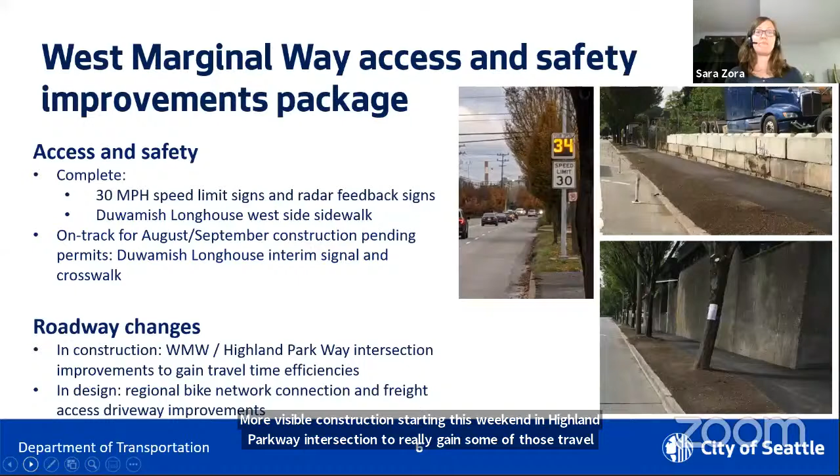As you know, we also have additional roadway changes coming. We're going to be in construction here starting, we've done some light construction already, but more visible construction starting this weekend at West Marginal Way and Highland Park Way intersection to really gain some travel time efficiencies. I'll talk about that in the next slide. We're also still in design on the regional bike network connection and some of the freight access driveway improvements we want to make.

If you go to the next slide, I'll just remind people about what the West Marginal Way, Highland Park Way intersection improvement is about. It's really trying to ensure that we can have more efficiencies at this intersection and make sure that the traffic signals can really produce and move more people than we are able to at this time. So this graphic is just a reminder of some of the things we have coming up here.

We're going to be removing portions of some of the islands that you see in the intersection right now, and those are highlighted in the orange color. A big purpose of this project is to have two left turn lanes from southbound West Marginal Way to eastbound Highland Park Way, to be able to do those two maneuvers at the same time as a right turn from Highland Park Way to northbound West Marginal Way. So those were some of the big parts of the intersection improvements we were making.

We're also going to be adding accessible pedestrian signals, and we will be upgrading all the curb ramps at some point in the future as well. The primary curb ramp we're going to be focused on is the northwest corner of the intersection, where we're going to be relocating a bus stop as well. So we really wanted to make sure that had solid pedestrian amenities and accessibility. Again, this is really helping us make sure our signal timing is going to be coordinated with other signals along this corridor as well.

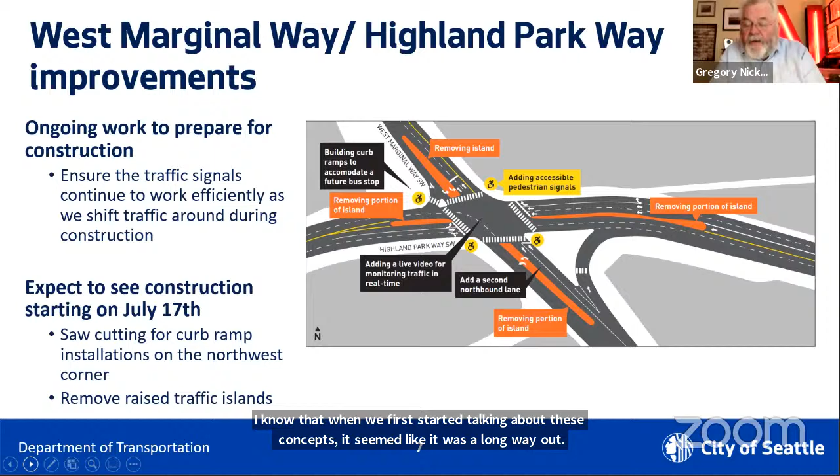Thank you. I know when we first started talking about these concepts, it seemed like a long way out. It seems like you've moved it forward a fair amount, and I want to thank you for that. I know that represents a lot of work on a number of people's parts. It's really good teamwork with our design teams and our crews, aligning it all appropriately to get it done.

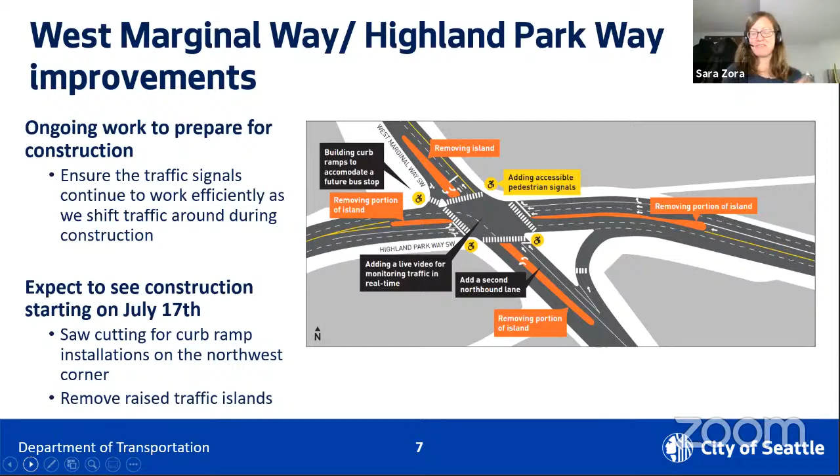So there's a lot of background going on for this project. Megan, if you can go to the next slide. We're going to talk about some of the larger part of the roadway change project. As you know, the connection for the bike lane we had recommended was going to be a 2-way protected bike lane in the outside curb lane, that southbound lane.

What you see in front of you is a cross section of West Marginal Way Southwest looking northbound. We are committing to maintaining freight mobility by having 12-foot travel lanes, which is in our design standards, plus a 8-foot 2-way protected bike lane with a Jersey barrier as the protection and a larger buffer space than typical to improve sight lines and provide a comfortable space for people riding bikes, while maintaining that mobility. All the analysis we've shown indicates the impacts for people traveling in their vehicles would be negligible, about 5 seconds maximum on average total delay.

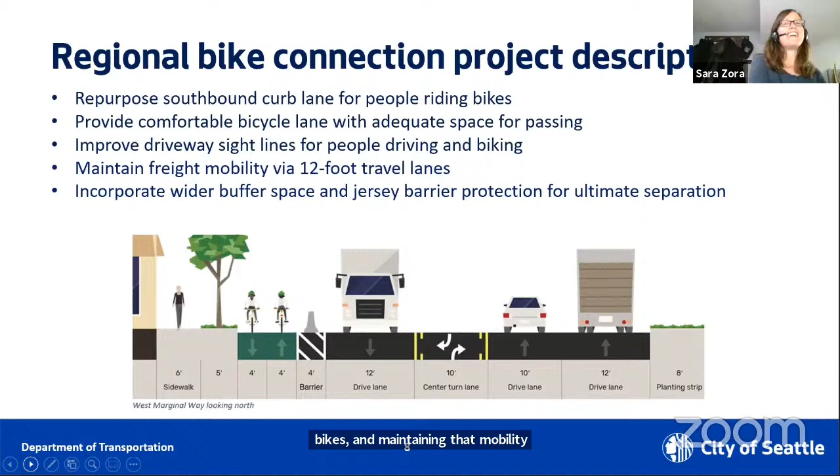Excuse me, you can go to the next slide, Megan. The decision is that we will be building that bike connection to really connect the Duwamish River Trail to the West Seattle Bridge Trail, using that southbound outside lane to create a 2-way protected bike lane and on-street parking, after the High Bridge has reopened in 2022.

As you've been aware, we've been having conversations with the community task force, different stakeholders, and adjacent business owners. We've received a lot of different input—some really strong negative opposition, and some strong input reflecting how people feel the city should be moving for the future by adding mobility choices, predictability, and safety. There was general consensus from all sentiments about holding off on building that project until after the High Bridge has reopened.

If you go to the next slide, we really believe this project helps achieve our city goals of Vision Zero by eliminating high-speed passing and getting a single lane configuration for mobility. There's no impact to vehicle capacity because we have our single lane capacity limiter at the Chelan 5-way. As you come approaching southbound West Marginal Way through our bridge structures, we feel this will help achieve the Vision Zero goals we have for our city.

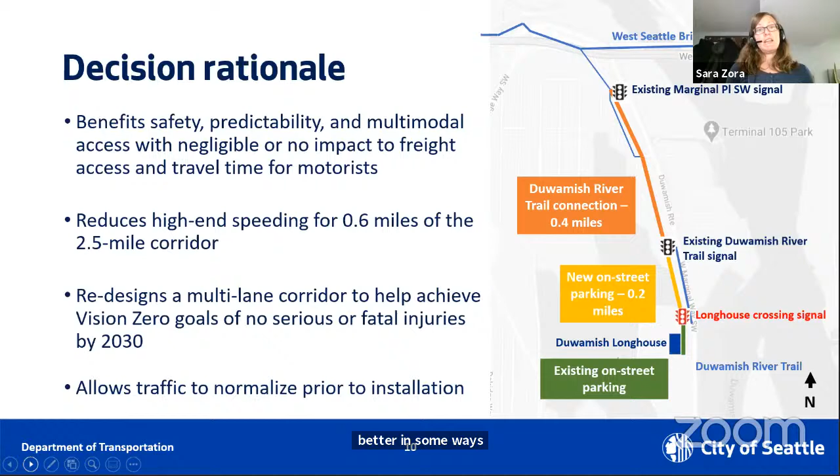If you go to the next slide, I think we wanted to open it up for discussion, additional questions. Let me—and please use the raise hand function.

Is this a recommendation from SDOT to the mayor, or is this a decision the mayor has made? This is a decision that the mayor has made. So we will be building the two-way protected bike lane for 0.4 of a mile and on-street parking for 0.2 of that 0.6-mile corridor, to really have a good connection for people riding bikes and a better, predictable, and safer street for all travelers for that 0.6 of a mile.

Well, I think there's room to disagree, but thank you for letting us know. From my perspective, co-chairing this task force, having it occur after the bridge is reopened, I think is really important. I think that sends a good message to people that there's sensitivity to the effect this is having on everybody. So thank you, and thank you to the mayor for that.

Yep, for sure, we heard that pretty loud and clear. Liz, I see your hand up. Hi, Liz from West Seattle Bridge Now.

From the community, what we hear is that traffic is terrible and getting worse, especially as school starts again and people go back to work. You've done a lot of improvements that you've talked about on these calls and that are outlined online. But have you thought about measuring the return on investment for these improvements? For example, has creating additional bike lanes improved the lives of West Seattleites? Is there an opportunity to gauge the public to see if all of this is making an impact and making commuting easier?

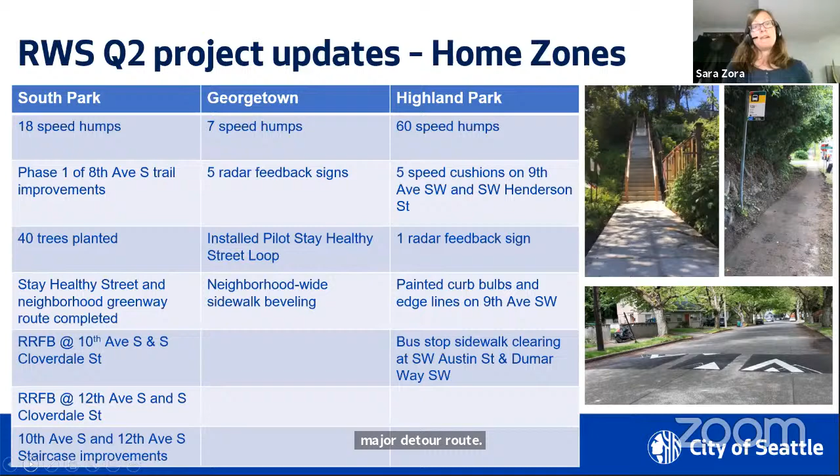And we've also done some sidewalk and staircase improvements to really help that walkability within South Park as well. If you go to the next slide, we also have this component of Reconnect West Seattle that really focuses on all the detour routes and traffic mitigation.

So from this past quarter, we've done a couple of different projects to help facilitate access for Fire Station 36, making sure people aren't blocking them in case they need access for emergencies. We've installed, as Deb told us last month, different chevrons for the Sylvan Way speeding concerns we've had there. We've installed additional radar feedback signs, and we've lowered the speed limit on the South Cloverdale detour route, along with a lot of different paving projects.

We've actually had some pavement and heat issues from the heat we had, so we had to do an emergency repair along West Marginal Way, basically at Front Street. Our designers and crews have been quite busy trying to ensure we are maintaining and allowing those detour routes to operate as efficiently as possible.

We do have some upcoming paving on Southwest Roxbury Street, and we're going to be doing that in partnership with King County Roads, because we own half of Southwest Roxbury and they own the southern half. So you'll see some paving coming up between the blocks of 24th to 25th during weekdays, due to the needs of our King County partners for their construction.

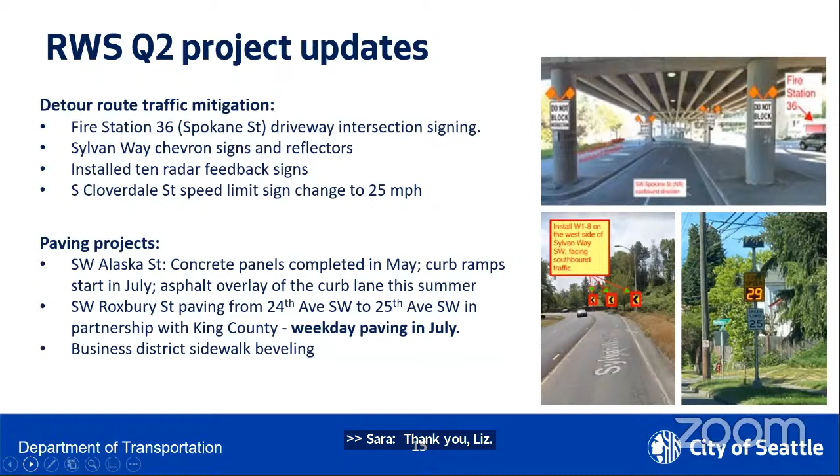Okay, if you go to the next slide, I am going to take a little time to pass the mic to Chris Vilopoulos so he can talk about our 2022 projects that we have coming up for implementing Reconnect West Seattle. Go ahead, Chris. Thanks, Sara.

Hi everyone, this is Chris Vilopoulos with SDOT, and I'm here to talk about the 2022 project selection process that we recently concluded. This effort came from one of the 5 key goals of the Reconnect West Seattle implementation plan, which was to engage with the community to address localized needs as the West Seattle Bridge closure continued to impact neighborhoods. So up until the end of March, we've been aggregating every community project request that's either been emailed directly to the team, sent to the West Seattle Bridge email, or collected from any of the other outreach events that occurred in response to the West Seattle Bridge closure.

We received almost 500 project requests from the community. As stated, we closed that review at the end of March, and we've been doing reviews of those projects, basically a rolling review that we've concluded recently. After collecting all those projects, we did an initial project review, just to ensure these projects were actually feasible from a conceptual level, if they were related to the bridge closure and mitigation, if they stayed within a reasonable cost estimate, and we also reviewed projects that had already been constructed between the time we received the request and the time we're actually reviewing.

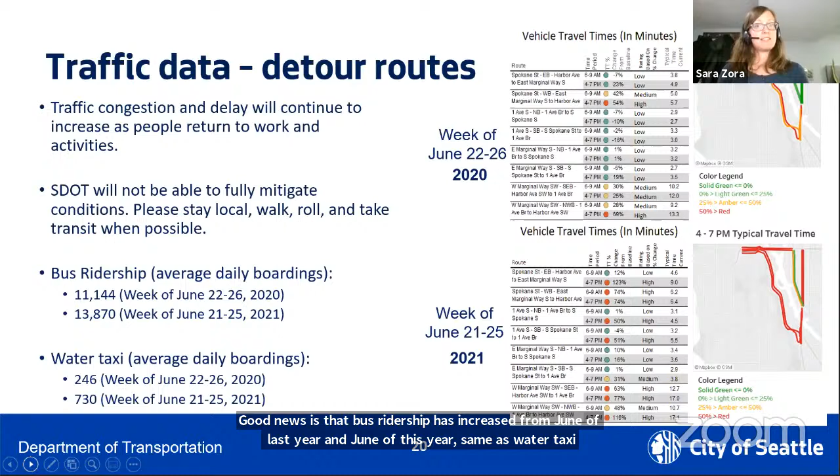I wanted to give you more information about what's coming up for some of our travel options programs. We do have a travel options program, which we call the Reconnect West Seattle Mobility Action Plan. This plan is broken into two lenses: community-based travel options and employer-based travel options.

For community-based travel options, we're going to be getting more visible and vocal, trying to ensure we have good partnerships with different community organizations. We're starting to work in the community to promote travel options, kicking off implementation August 1st. By the end of August, we're hoping to launch a Transit Go ticket that people can sign up for, getting points rewarded that subsidize different trips, such as on transit or micro mobility.

We are wondering what kind of in-person community events are out there that SDOT could be included in. We will be at the Georgetown in-person traffic event on Saturday, July 24th, which is pretty exciting. We've done some neighborhood walks with home zones, but it will be nice to be in person, sharing ideas and hearing from the community.

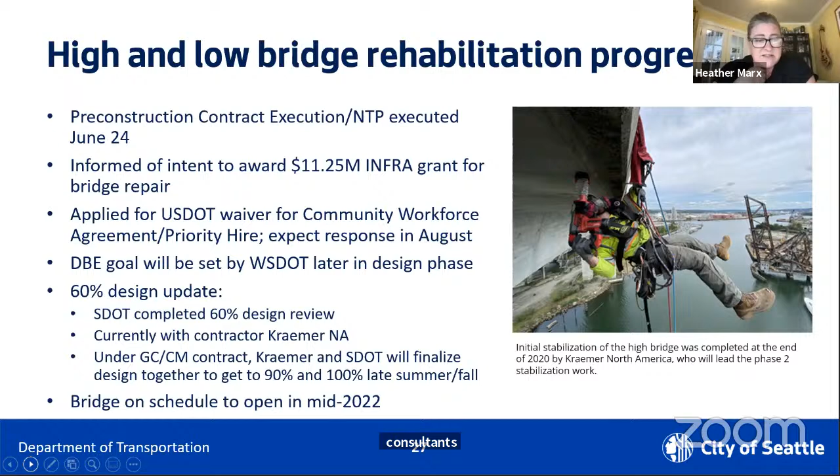We will set a disadvantaged business enterprise goal later in the design phase. That's something that WSDOT does for us. We have achieved 60% design. The plans are now with our contractors, and we will work together with our contractors as well as our design consultants to move forward to 90 and then 100% design this late summer and then fall. We are still on schedule to open in mid-2022. Next slide, please.

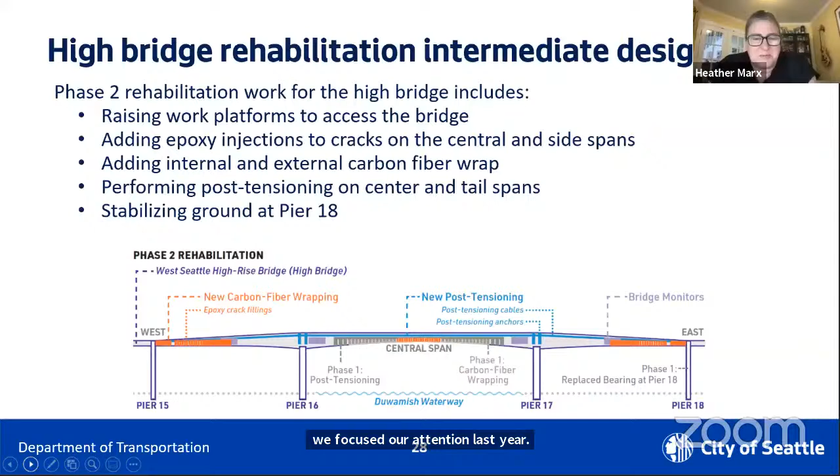So just as a reminder, we did a whole bunch of work in that central span when we did the stabilization work last year. This work we are doing is going to include carbon fiber wrap as well as post-tensioning that will go all the way from the edge of the tail span through the center span to the other side. That work will help strengthen the bridge and includes more than just the center span where we focused last year. We're also going to stabilize the ground under Pier 18 to make sure we have good performance in the event of an earthquake.

Next slide, please. So this is a new graphic, I hope you like it. It shows the tail span as I was just discussing, and it shows where those post-tensioning steel cables are installed, as well as the anchors. We'll see a little better picture of that on the next slide, but it also indicates where the external and internal carbon fiber wrap is going to go.

Next slide, please. This is a section view that shows what the tail span is going to look like on the inside. The center span already has a whole bunch of post-tensioning steel cables and those anchors. I want to take this moment to gently remind everyone that a bridge is a very complicated piece of infrastructure. It's not like a regular road, and there is a great deal of engineering that needs to go into the process of adding this strengthening equipment to the bridge.

Steel cables and concrete blocks are really heavy, and bridges work together in unison, each member supporting and reinforcing the other. So when you change one of the members, you have to make sure that you've made compensating movements all through the bridge. That's why the process of design is so important and why it takes so long.

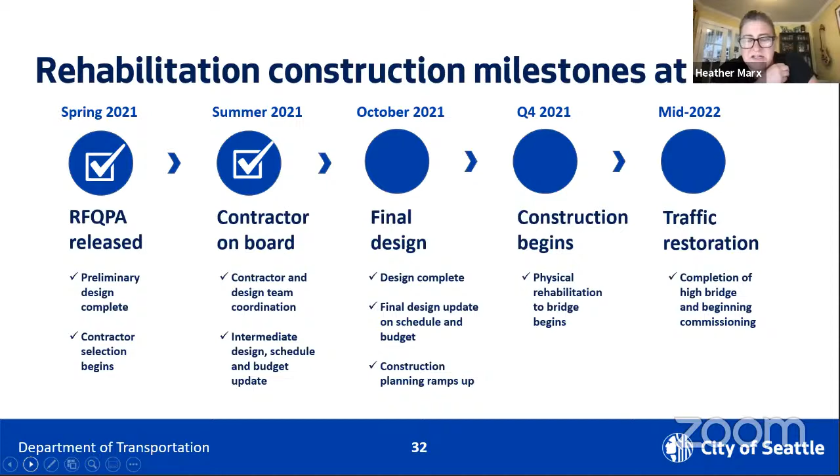Next slide, please. And for all of those who have been waiting for a more finely grained schedule that I promised you for 60% design, here you are. You will note that we'll be in construction in October. We will have worked through the maximum allowable construction costs with our contractor, and we will begin some of those early work packages. One of the things that's different about doing a GCCM, General Contractor Construction Manager contract, is we don't design the whole thing and then put it out to bid. So there's not like a single day when construction starts.

We'll start doing some of those early packages of ground penetrating radar and ordering materials. Just some of them can happen before we're at final design. We'll order materials the moment that we're done with final design. Obviously, you don't want to order the wrong kind of cable, that could have disastrous consequences. We will be installing the work platforms in November, and we will be installing the carbon fiber wrap and mounting the external post tensioning and completing the epoxy crack injection in the first quarter.

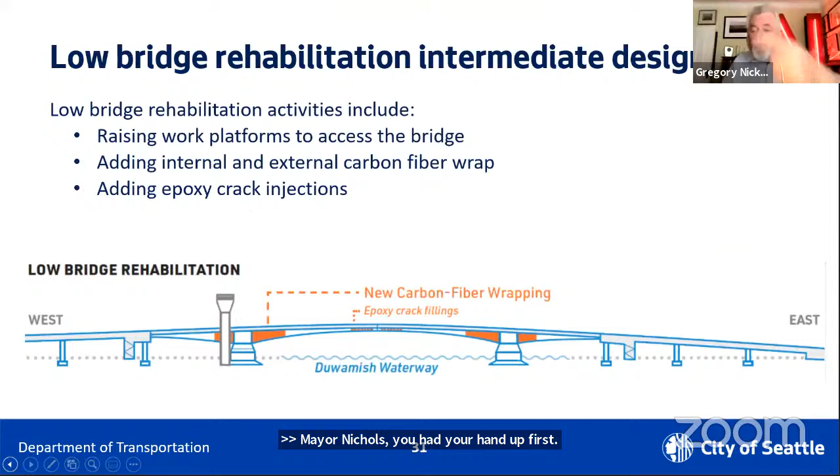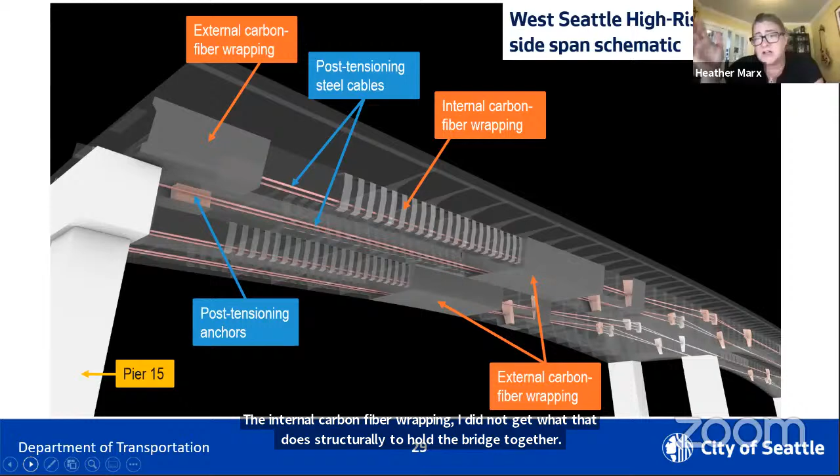So you could think the internal carbon fiber wrapping provides that additional rigidity, just like the external. So when we say internal, this means internal to the bridge, right? Not internal to the concrete. So that's just going to provide some additional rigidity to the concrete and help balance out the tension that the steel is going to bring to it. So all of these things are carefully engineered and mathed within an inch of their lives to make sure that we're balancing the various forces that are at work on the bridge.

But what is it wrapped around? It's not wrapped, it's more like wallpaper. Oh, think about - and actually, it's not really wrapped on the outside either, it's more like wallpaper. Okay, I've never thought of wallpaper as a structural element, but okay. Yeah, well, if it's carbon fiber reinforced polymer wallpaper, it definitely is. It's harder to remove, I bet. Yes, thank you, thank you.

Deb, you have your hand up? Hi, this is Deb Barker, and I have one reply to Mayor Nickels.

And the bridge - when I was on the landmarks board, I learned about a bridge, I think the 15th Avenue Bridge, north of the University District, which is a landmark, and they had carbon fiber wrapping on that landmark bridge. So it's in different areas for you to go see, but you may not know about it. So just heads up, that's when I first learned about carbon fiber wrapping and bridges and all that good stuff, but who knew it was on the landmarks board.

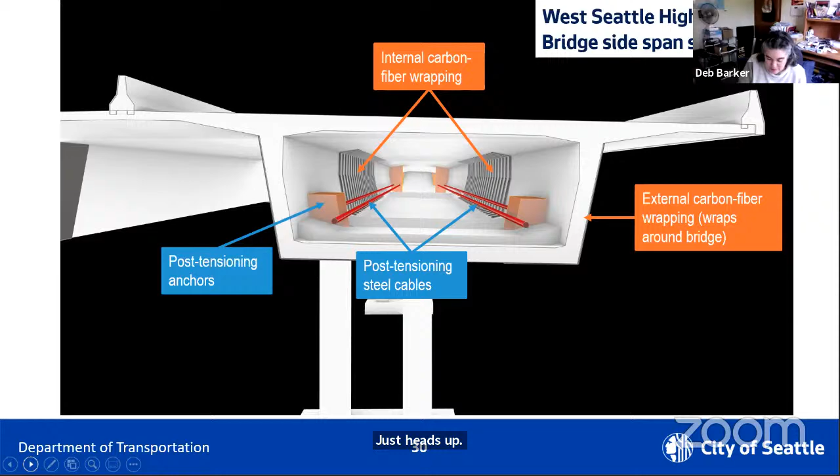Going back to the PowerPoint, on page 34, there was the corridor maintenance work, and I was just curious if on that list of work there are things such as I brought up last week about the roadways with exposed rebar and the substandard road conditions. Beyond this, I guess it would be east of 4th Avenue South. Will there be an I-5 to Fauntleroy Way fix up of the roadway system once the bridge is open, or is it still going to be incremental based on funding?

So some of that is one of the things that we would very much like to do in advance of opening the bridge, but there may be a problem getting that done without delaying the repair project.

So that was one of those things that I was talking about, that there are some things we would very much like to do, but we don't want to delay the opening of the bridge in order to accomplish that.

Got it. Okay, so I just, because it just went to 4th Avenue South, I wanted to confirm that you were looking even further east, maybe to I-5, but it just wasn't reflected on the map, and it may not work out with timing constraints.

Well, so the deck scan that we are doing is on the Spokane Street viaduct. So that's a structural thing to make sure that it's good to go, right? Okay, if there is spot repair that you feel is necessary on the Spokane Street viaduct, if you could send me a note with the rough locations, that would be good.

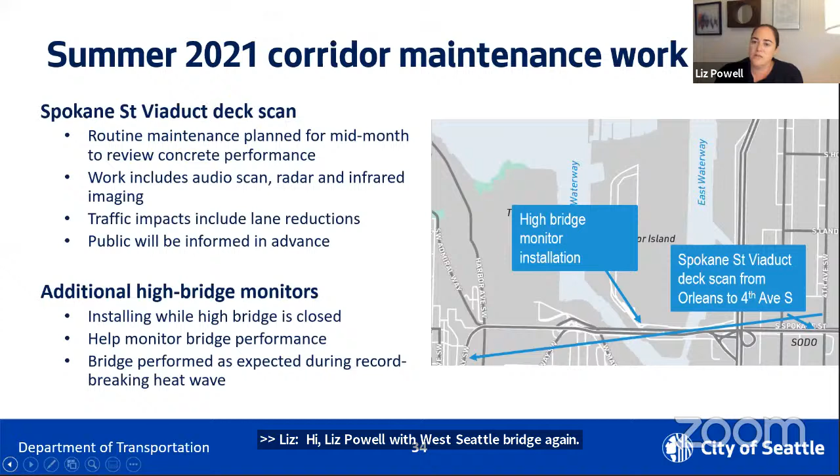Given the final design timeframe, I think it's September, correct? When that'll be completed, will this group have an opportunity to hear from Kraemer on sort of a detailed scope of work during that timeframe? Do you anticipate that happening at all?

Sure. Yeah. Okay, and then a second question that's somewhat related, and forgive me if this has been asked on a past call, but just looking at the timeline, and our targeted open date is around this time next year, there's been some rumblings and consensus in the structural engineering community that the bridge may, given the repairs that have already taken place, be able to open in some capacity before this mid-2022 timeframe. By some capacity, I mean going one way in, one way out. Has that been discussed? Is that something the structural engineers could answer?

Well, I'll tell you, Liz, I'm not sure that I agree with the premise. I don't think that there's consensus in the structural engineering community about that. The structural engineer of record for this structure does not concur with that assessment. And I think, candidly, for structural engineers who are not involved with this particular project to be suggesting that there's some faster way for us to get there is mildly irresponsible.

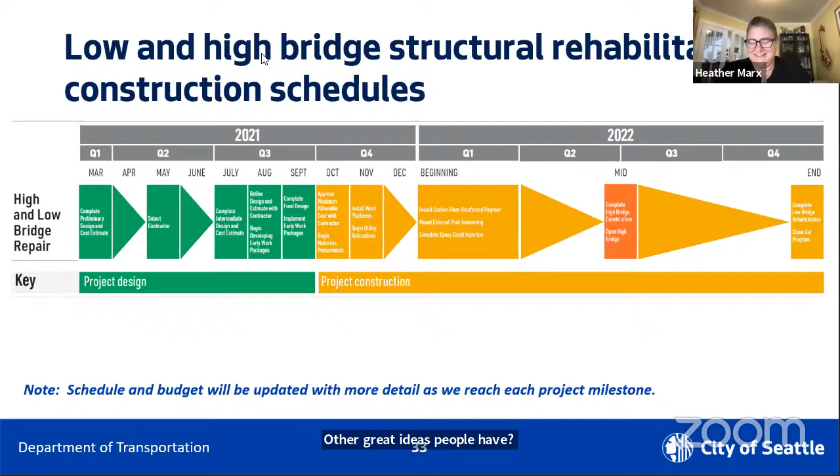Yes, I'm ready, thank you. Hi everyone, I'm Danielle Friedman. I work at SDOT on outreach and engagement with the West Seattle Bridge program, and I'm going to talk about some of the work we're doing to engage community.

Next slide. So we thought this would be a great opportunity to give a big update to everyone in West Seattle on what's happening with the bridge, especially letting them know the bridge is on schedule, on track to reopen in mid 2022. We've made a bunch of updates to our website. We're having a big virtual public meeting on July 21st, starting at 5:30. We let everyone know about this.

We sent a mailer to 50,000 addresses in West Seattle and Duwamish Valley, and my colleague had the great idea to put a little starburst on the front saying bridge is reopening in summer 2022, hopefully. We're getting the word out, hanging up posters, doing radio ads in Spanish, digital display ads in multiple languages, social media, and paid media ads in 8 different multicultural and local outlets.